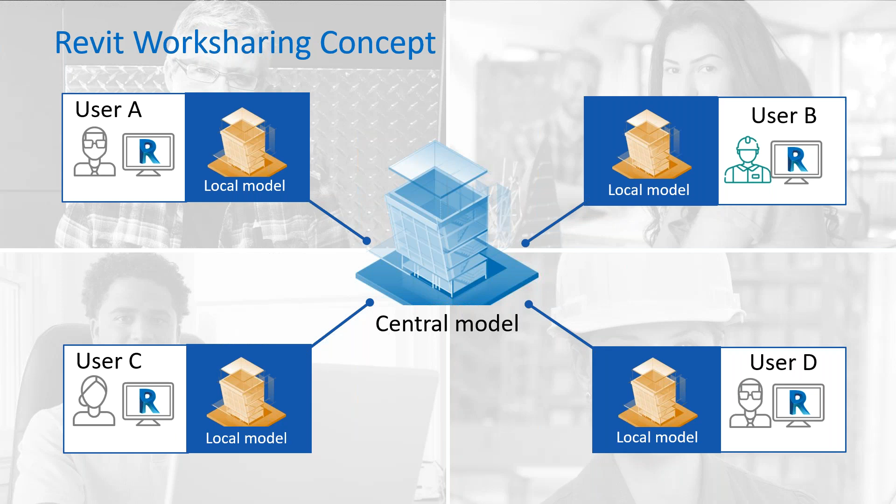The only difference is we're not connecting to a local central model or Revit server, we're connecting to the cloud, which has all kinds of benefits in its own right. We'll talk about that in a second.

We're obviously going to use that work sharing concept, as I mentioned. But what we really wanted to do is take it to the next level—how do we make sure that not only can we connect different users within one company, but how do we set up for success between different design disciplines and different teams? Architectural team and structural team, or architect, structural, and MEP, maybe landscaping and architectural, etc. So it's this question of how do we move this forward—work sharing is one aspect, but how do we connect different teams together? That's really what this session is all about.

For those who aren't familiar with this concept, BIM 360 is our portfolio—and I specify portfolio, it's not just a product. It's a whole portfolio of communication, I would say. BIM 360 is a cloud-based portfolio, what we call connected BIM—BIM with the power of the cloud, as I mentioned before. It means we're going to have a communication process between different users, different disciplines, and different companies through a cloud-based storage platform. That storage platform is called BIM 360 Docs.

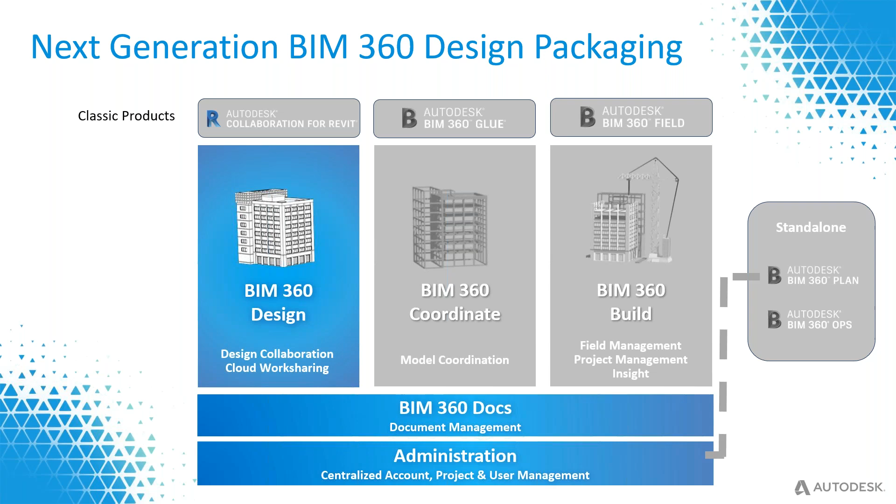Okay, so as I said, we're going to be focusing on BIM 360 Design today. So when we talk about BIM 360 Design, we really have to look into the details. And again, specifically today, we're going to be focusing on the Revit component. So it essentially means that from a Revit BIM 360 Design point of view, we're talking about 3 bits and pieces which make up BIM 360 Design.

One is the interface inside of Revit itself. And that is nothing new, actually. That's been in Revit for, I don't know, 10 years or so. So save to central, reload latest, as I mentioned earlier on. It's actually the same buttons. The only thing we do is we push information from Revit, from the worksets, into a central model, which this time sits in the cloud.

And when I say it sits in the cloud, it essentially means that we're pushing data into that base module, if you will, which is BIM 360 Docs.

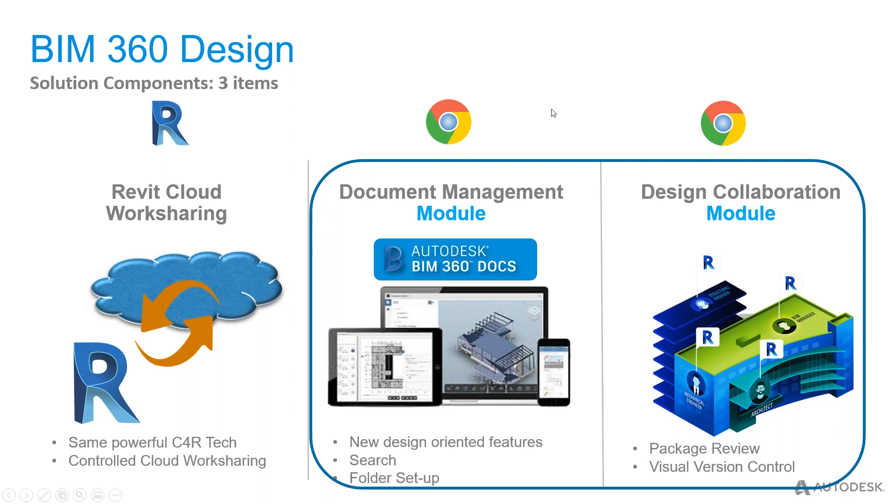But this is really where we want to make sure that we have an official and auditable handover process between different disciplines. Essentially, we want to get rid of those discussions where somebody says, well, I never received your file, or this is the file I was working on, and then it turns out it's not the latest version. So that sort of handover process, we want to have that fully automated, and that's really where this Design Collaboration module comes in.

Okay, so a couple of more concepts, and then we're actually going to dive in. So saving versus publishing. So what you have to understand is that if you look at BIM 360, then there's a couple of aspects here. So as you've seen, there's a couple of modules.

So we do have the users in Revit. There is a central file, but we also have BIM 360 as a location where we have visible files for the wider community. Because one of the things, as I said, it's not doing it justice. It is sort of a Windows Explorer in the cloud.

Well, one of the aspects where it differs from that concept is it has what we call the large model viewer integrated in it, which essentially means that we can view files without having the actual original editing software or authoring tool. So it means that we can view Revit files.

It means that we can view DWG, DXF, but also other file formats such as DGN, IFC, SketchUp files, etc. And the quite critical part here is, as I mentioned, you don't need anything local on your machine. No design review, no DWG TrueView or anything, or even Revit in demo mode or whatever. No, you can just use that viewer and understand those files.

Actually, the next step forward is then to make markups on those files, send them back to the original designer. So again, this is all about communication and optimizing collaboration between different teams.

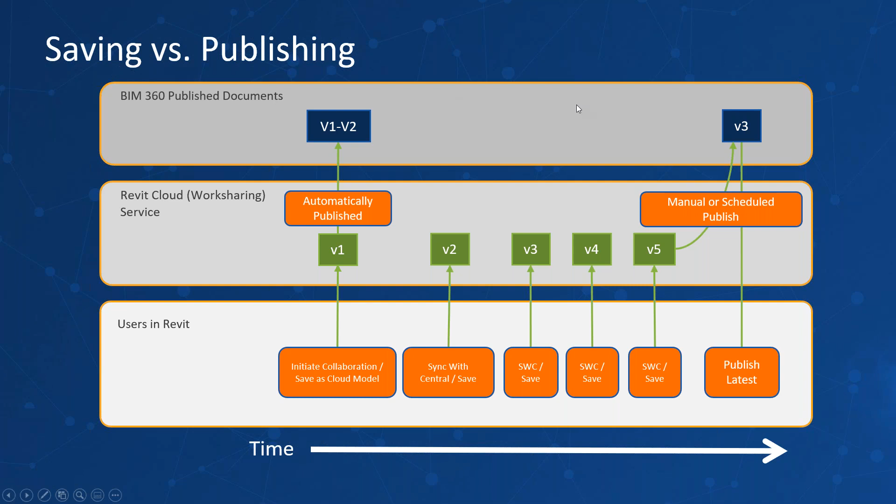Now we're not there yet. So what do we do when we want to communicate between different disciplines? Well, because this is based on BIM 360 Docs, and I'm going to come back to the basics, which is sort of Windows Explorer in the cloud. Well, we can set access rights to BIM 360 Docs.

And so that means that I can actually have an official handover process. And remember, I mentioned this as being part of that BIM 360 design concept, which is the design module in the cloud. So what you'll see is that we're going to have this bubble, which is, for instance, the architectural team doing their iterative design, so save to central, reload latest, etc.

And then we're going to have a BIM coordinator specifically for the architects. He's going to be reviewing that design, and he's going to make sure that he makes something visible for the other parties, for instance, the structural team, to consume, right? We call that a package. So that architectural...

BIM coordinator or project leader or whatever you want to call it, he's going to review the design of his own architects, for instance, could be structural, could be MEP, could be anything really. And he's going to make sure that he's creating something called a package, and you'll see that in action in a minute. And he's going to store this, and this is going to happen actually automatically.

He's going to make sure that that is visible to, for instance, the structural team. Now that structural team also has a BIM coordinator in this concept, or a project lead or whatever. So he's going to review the information he's receiving from the architects. It's not because the architect sends something that everybody has to agree to what they're sending out. So he's going to review this, and he has to accept this or consume this or refuse it. So let's say he's consuming this.

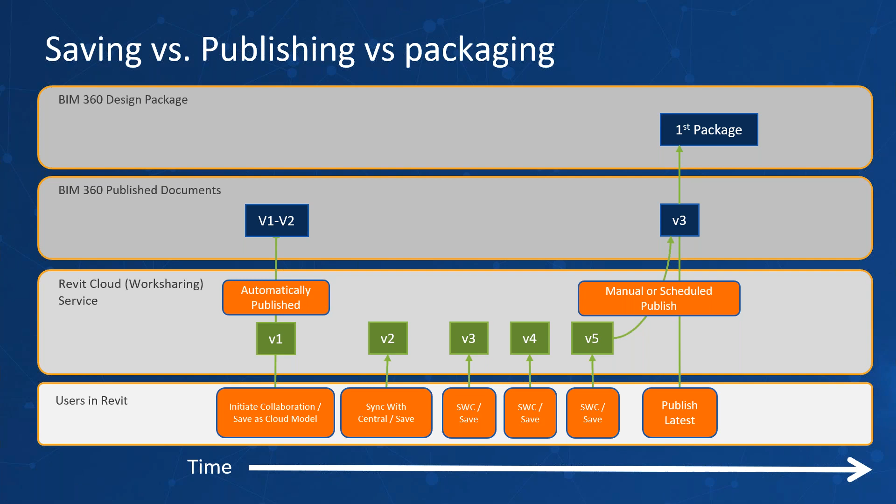Okay, so this is where I want to end right now, and actually let's dive into the product here. So let's go into BIM 360 design.

Okay, so what you'll see here is the design module. Remember, we've got the Revit interface, we've got Docs, and we've got this sort of filter, which is the design collaboration module in the cloud. And what you'll see here immediately is a timeline. So that Save to Central publishing packaging is something that is actually explicitly there in the timeline.

What you'll also notice is that in this case, I'm working with two teams, the architectural team and the structural team. Okay, so you'll also see that there's this square here on this timeline.

And one of the questions I received last time was, well, that's all fine, Revit, but what about IFC? Can we integrate IFC in some form, shape, or other into this workflow? And you can actually. So what you'll see here is that the structural engineer, maybe he's using Tekla and they're exporting to IFC.

Well, what you'll see is that if I go into detail as to what that structural engineer is producing, in this case it's one file - could actually be multiple files. Again, we're not going to go into too much detail here, but they're actually looking at a Struct.ifc file. I'm keeping it very simple here, it isn't really a grand design or anything, but we can have a look at this.

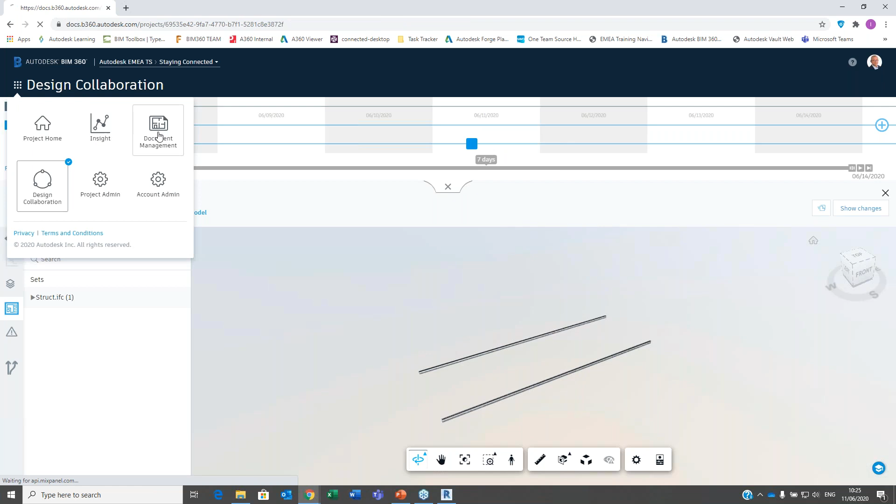So how did I get here? How did I get this structural IFC file to become visible in design collaboration? Let's go back here for a second to BIM 360 Docs, because as I said, it's all integrated, and what you'll see is this sort of Windows Explorer in the cloud, and this is where my file sits.

Struct.ifc version 1, which was created today actually. So how do I get this file into BIM 360 Docs? Well, that's quite simple because we do have a connection even from our local desktop machine - we call it Desktop Connector, and that's what you'll see here.

So there's an interface, which is BIM 360. You'll see that I'm moving on to my, what we call, hub - so this would be your company name, for instance. This is your project, so I've called it Staying Connected, which is today's webinar. Moving into project file structural - so essentially, if I'm using Tekla or anything, I can just export, move into this location and drop my file here. You even get to see the version and everything.

So the second that happens, it's becoming visible here, which essentially means it's visible in my design collaboration module in the structural interface. Okay, so this is just for me to view. Remember that this is a specific folder, and I can put security rights on it. Again, we're not going to go into too much detail here, just for you to understand that, for instance, the structural guys have full access to this, but maybe we've decided to not grant architects access at all to this environment, which would make perfect sense - structural should be in charge of structural design, right?

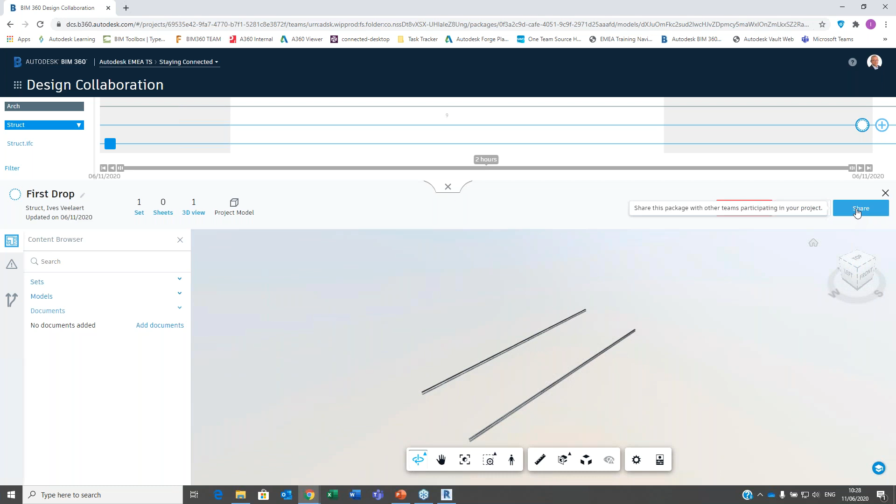Let's do that. And you'll see that now from my point of view as a structural team, this bulb gets colored. Now, the last thing I want to specify here before we take a look at what the architect is going to do is that there is a very specific difference between this first bottom timeline and everything that comes on top of it.

And when I say everything that comes on top of it, in this case it's architectural, but we're not limited to two teams, and you'll see that in a second when I move over to a full-blown project. We can have architectural, structural, MEP, landscaping, even MEP could be split up into piping, plumbing, HVAC, you name it. We can have as many teams here as we want.

So it's quite critical that you understand that this bottom one, which is, by the way, the only one that has the plus sign, which can create packages, this is essentially the company I work for. So me as a person here, I'm working for the structural team, and I'm a BIM coordinator. That's why I have this plus button, and I can create a package.

So what you'll see here on this timeline is that essentially I've used this design, the IFC file, and I've moved this forward as a package. Now, because I'm a manager, a BIM administrator in this whole project, I can actually do something which I wouldn't recommend in a day-to-day business.

I'm actually part of both teams, just for you as an example, so that I can take a look at this from both perspectives. So let's swap over to the architect.

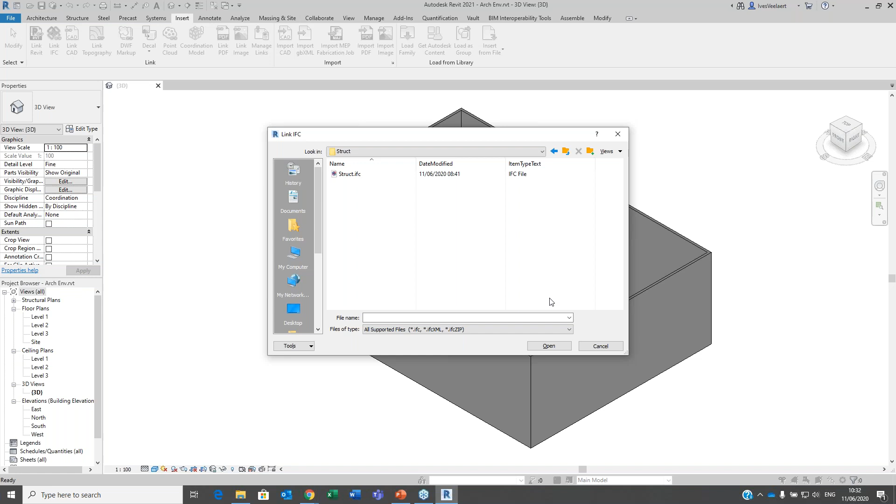So you see there's not that big a difference between a Revit workflow or an IFC workflow, but let's have a look at how I get this file into the cloud.

Okay, so first thing I want to do is obviously create worksets. I really started from scratch here, so I'm not going to specify too many worksets. I'm just going to go with the flow here. This is what we're going to be doing.

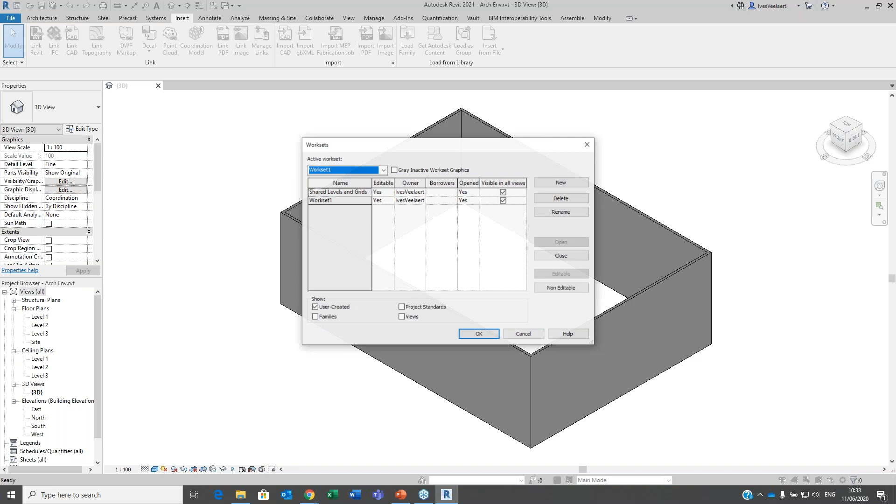And the only thing that I need to do now is say collaborate in the cloud. So collaborate in the cloud, save the model. That's fine because I activated worksets here.

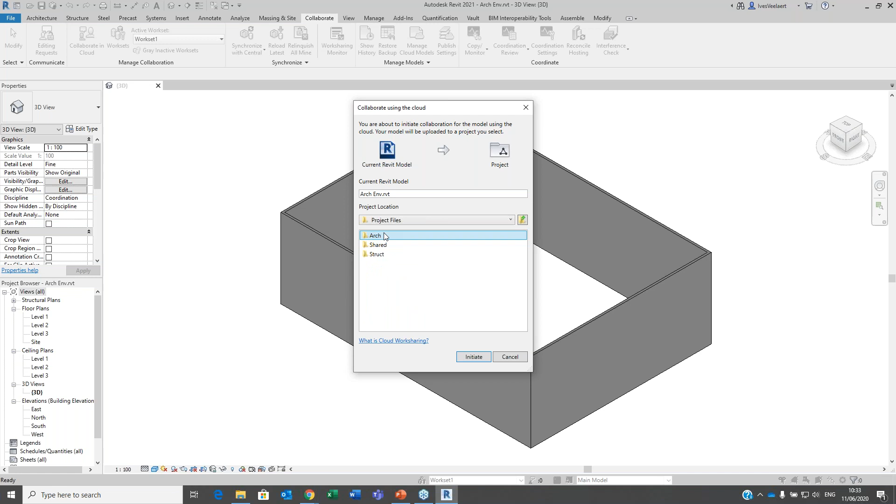And the next question I'm going to get is, well, where do you want to store this? So EMEA technical sales, staying connected, project files. I'm the architect, so I'm going to push this into the architectural folder, initiate.

What you'll notice is we're going to upload this model to the cloud, and that's going to become the central file. Then automatically - and that's different from central files on a shared drive or Revit server, where you still had to create your own local model - this is happening automatically in the background. So saving model to local cache. But apart from that, everything is very much the same.

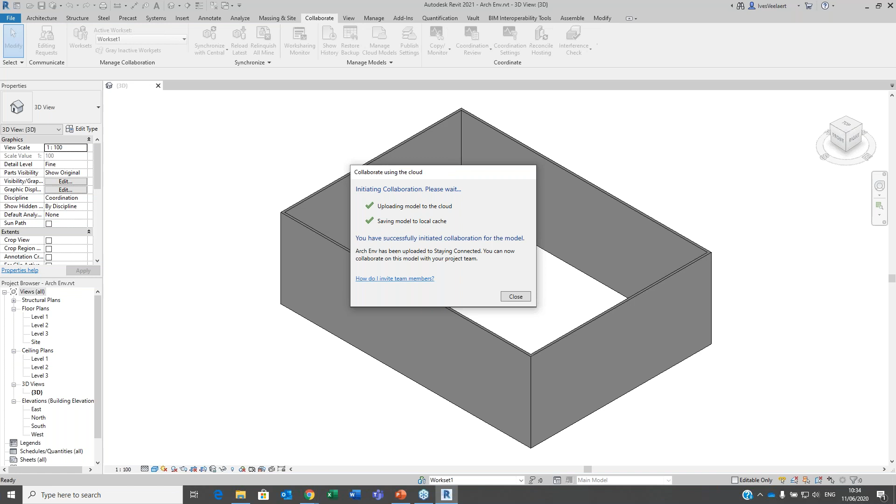The beauty is also that if you already have central files on an M drive or Revit server, you can actually open that Revit central file, detach from central, keep the worksets, and just say okay, save to the cloud. So you can move those files into the cloud, no problem whatsoever.

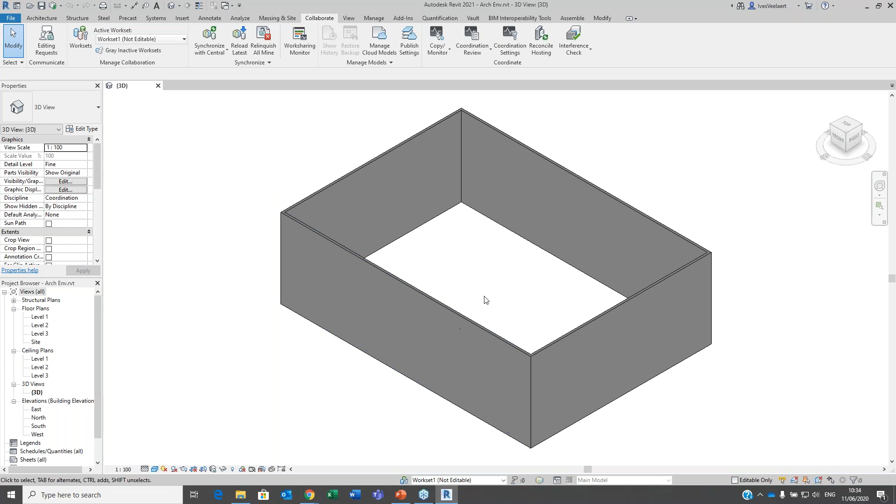So what you'll notice now is that indeed, if I go into collaborate, synchronize with central, it says now BIM 360 staying connected architectural envelope.rvt. If I go into my architectural environment, you'll see that it now says architectural envelope.rvt.

The fact that this is still working is that large model viewer. We're going to get a lightweight representation of this file so that we can use it on just about any device, because we also have mobile apps so you can review this file. Apart from that, this is all the same - I could go into design now, create a package, etc.

So swiftly moving on, because I do want to get into an interview with Thea here. Last thing I'm going to show you is how far we can take this, if you will. So let's go into a full-blown environment here.

And what you'll see is that I now have a different environment. It's called BIM 360 FY21, still on my hub. So this is a different project, and I'm looking at this from the structural point of view - that's the company I work for.

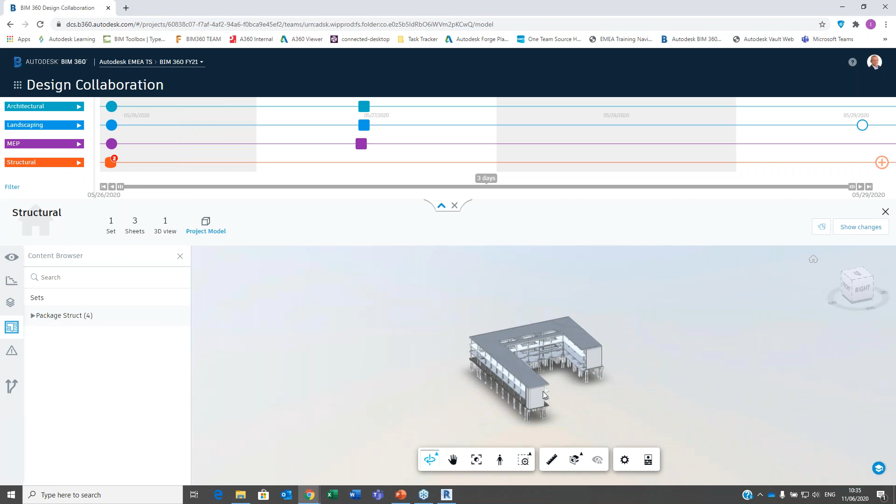So I could actually say, okay, let's have a look at this project model here. And you'll see this is a bit more developed - that's my structural design.

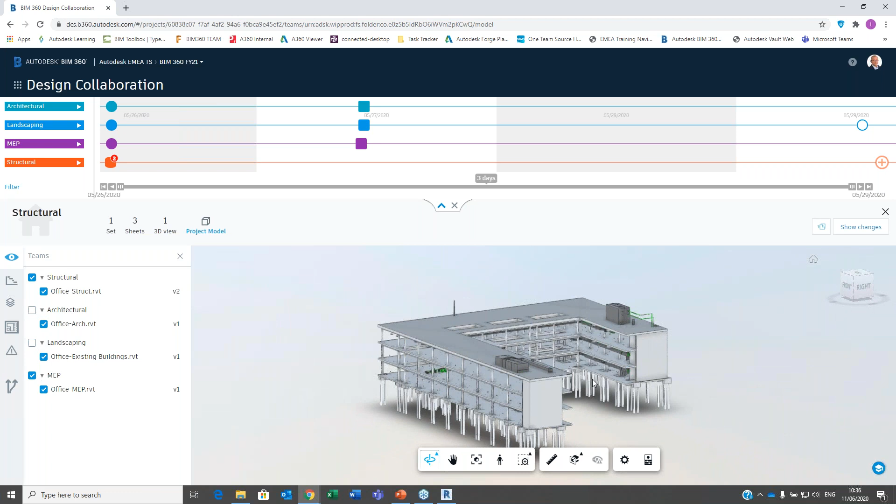Now, the cool thing is that the second you start accepting packages - and you'll see that in one blink of an eye - I actually accepted packages from architectural, landscaping and MEP. So I can actually activate, let's start with MEP, combine those files and look at this, okay?

I can actually put landscaping underneath. And remember, this could be IFC, this could be a Revit file, this could be actually a standalone Revit file - I'm not going to go into too much detail there, but we can save them as cloud models as well. And I can put the architectural envelope around that.

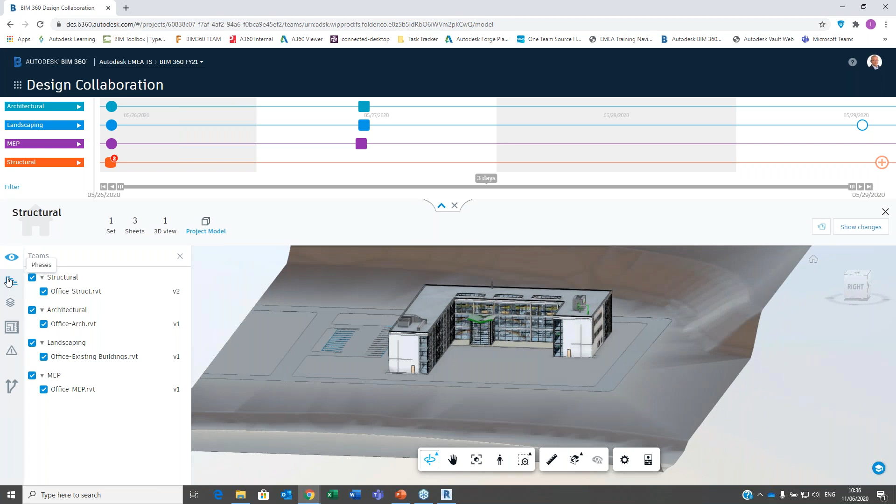Not just that, I could actually go to the second step and say okay, the phasing from Revit - let's have a look at the different phases. I've matched the phases, by the way, by linking those files and making sure that the mapping is correct. So that's what you'll see here.

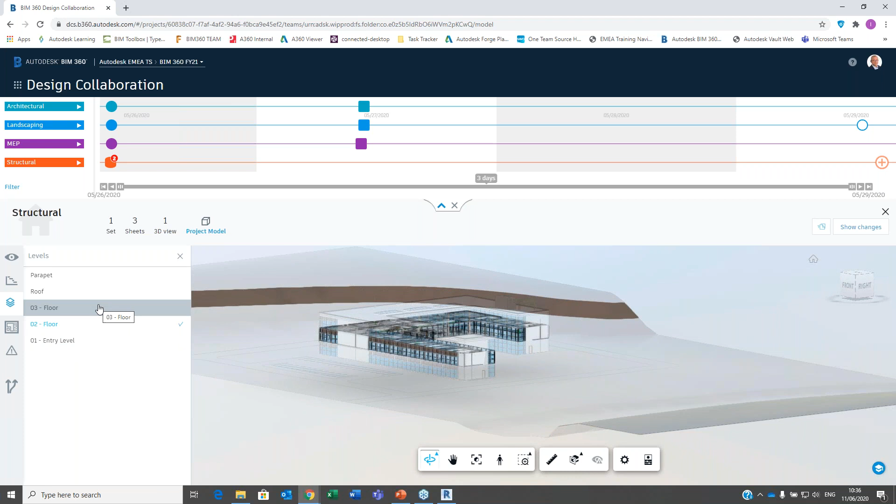But also I can have a look at the different levels, floor 1, floor 2, floor 3, etc. And the last thing here is that I can go and have a look at the content of, in this case, my structural package. And what you'll see is that, as I mentioned earlier on, we can have tech specs and what have you. We can also add sheets and details and what have you to this environment, if you will.

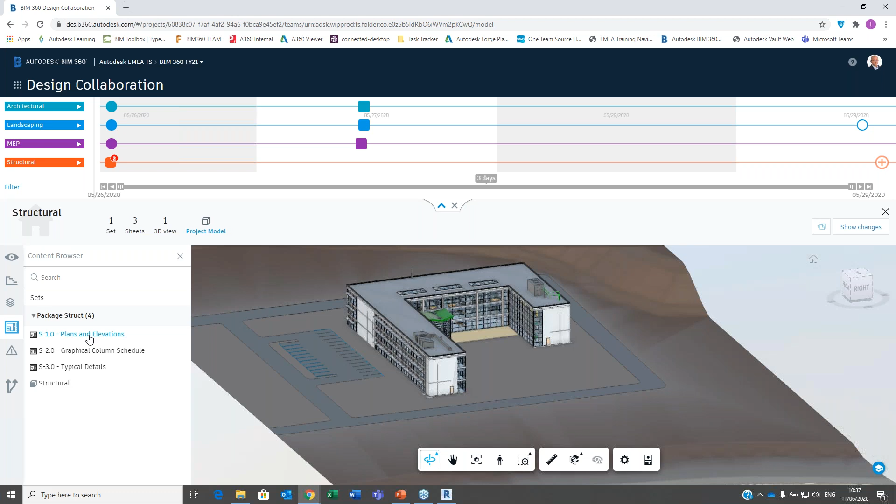So let's have a look at, and let's zoom out a little bit.

Let's have a look at one of those sheets here. I did mention in the overview and short description of the webinar that we were going to talk about something called hypermodeling. Hypermodeling comes in a couple of different shapes and forms. It's a concept of integrating sheets and the 3D model.

One of the first things I'd like to show you is that when you're searching for an address in Google Maps, you can get an idea of what that environment looks like by taking that little guy at the bottom of Google Maps and dragging it in, and then you get Street View. Well, we've got something similar here.

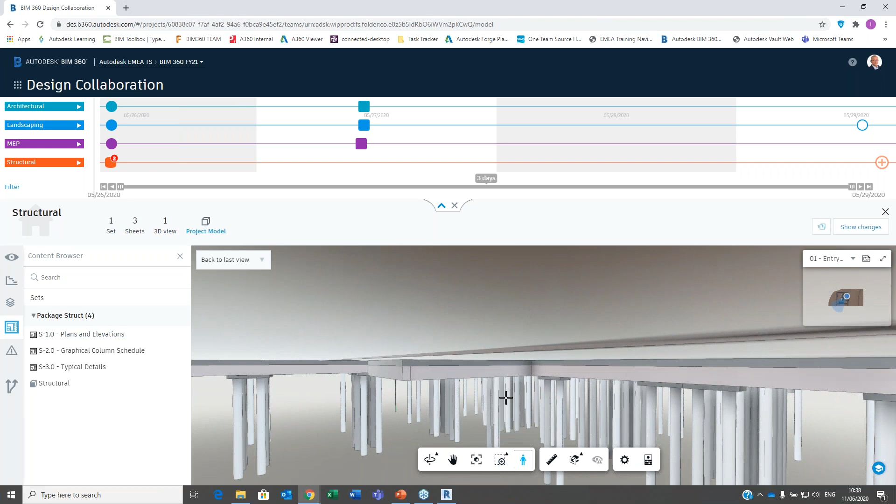So if I hit this button and say, okay, let's have a look at this, it's actually going to show me where I'm at here. I can have a look at my structural design.

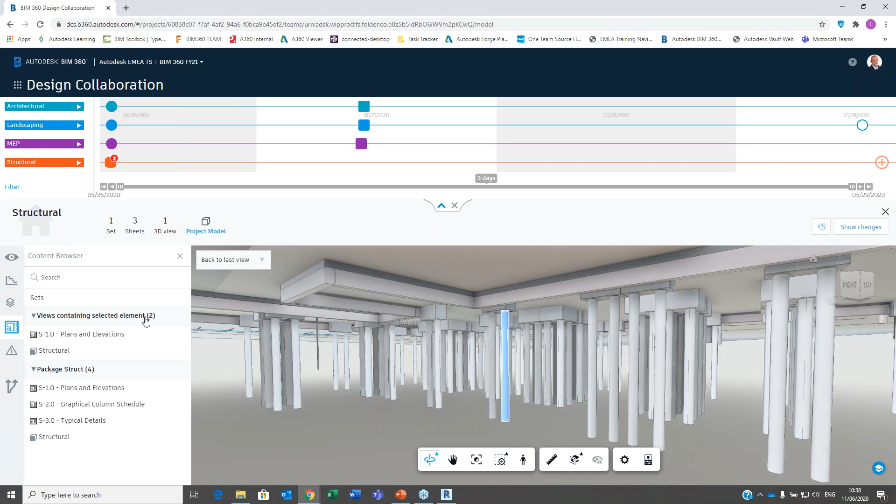Now the beauty is also that everything here is connected. Another aspect of hypermodeling means if I drop out of first person here and select something, you'll notice at the left that something happens the second I select an object. You'll see it says sets package structure. I select this and it tells me views containing the selected element. So I can go back to my plans and this object is still connected. I can zoom in, have an understanding of where this is, look at the properties, etc. So that's really what this is all about.

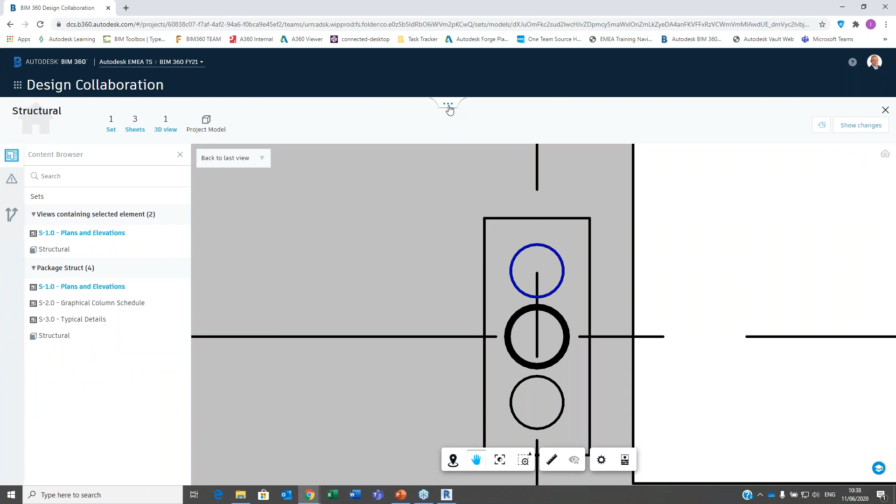All right, let's take a look at the last one, and then we're going to go into the interview. Let's take a look at, for instance, and let's close this for a second, the architectural design here. So just as an overview, I'm looking at this from the architectural point of view. What you'll see is the squares are files.

Actually, the publishing of the Office architectural file, this is a package, right? So what you'll see as the BIM coordinator is that we've published, and let's zoom in here, we've published right after the first, or we created a package right after the first version of the published file. Now, in the meantime, we have two more. If I click on this, we're zooming in, as you can see, 32 minutes. We've got a version here and a version here. So I could actually take a look at that.

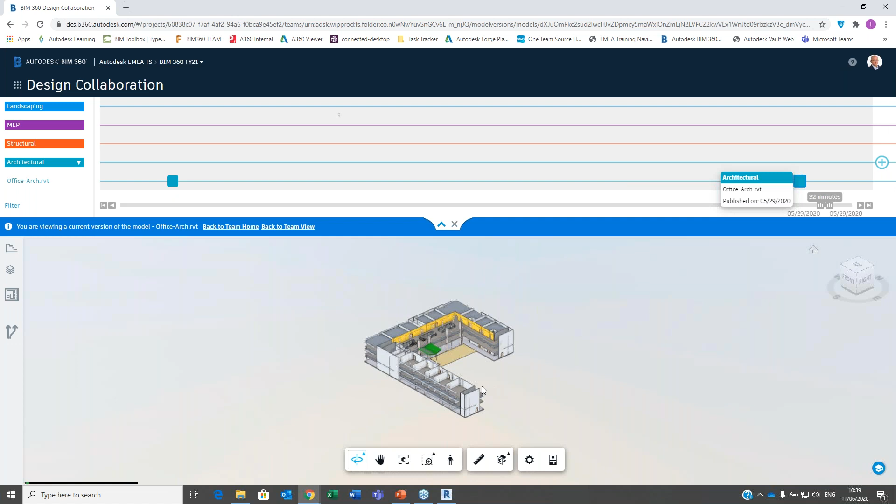Now the question really is, do I need to create another package? What actually has changed here? So the last thing I want to show you is that from a BIM coordinator's point of view, let's go back to document management here. And if I look at the design architectural point of view, we've got version 4 here.

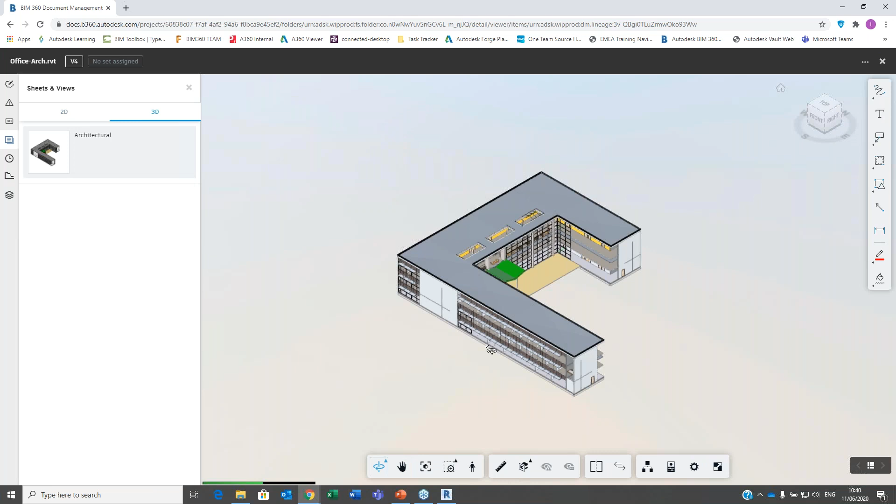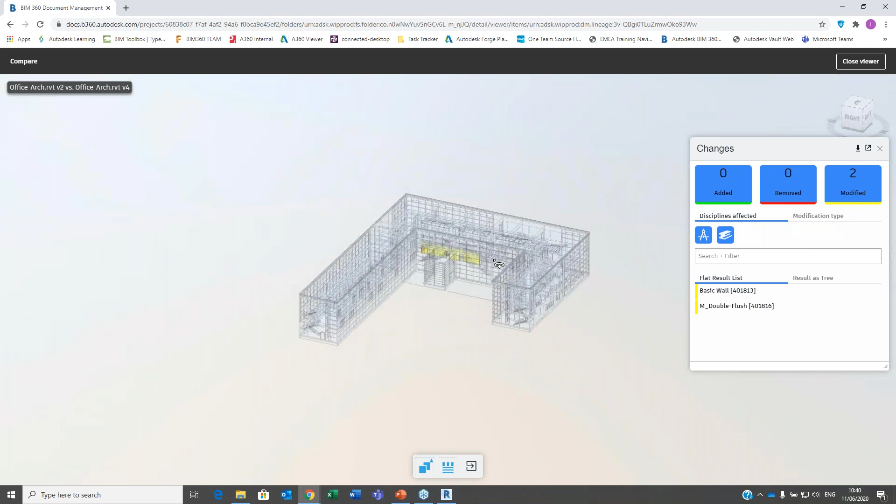That's the latest version, which hasn't turned into a package just yet. So what I want to understand is let's see what happened between that last version, and actually I want to look at the difference with version 2. So let's compare this. This large model viewer is doing a comparison between those different versions. What you'll notice is that it says there's two modifications here: there's a basic wall and a double flush door, which you'll see here. So I can click on that. There we go, okay, so this is version 2. Let's have a look at version 4. So we're actually understanding what has happened between those two versions.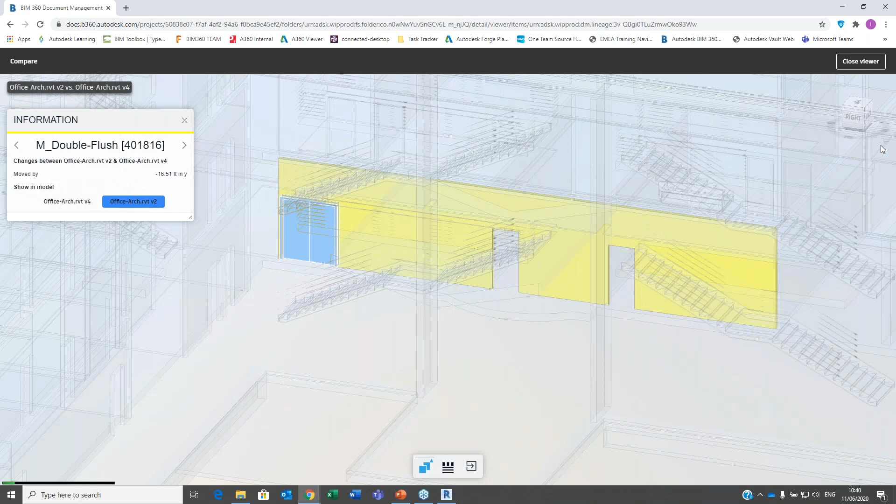I can go on and talk about issues, but we'll keep that to the next session. So what I really want to do now is come back to the PowerPoint here, and let's introduce Raami Architects. You'll hear from Teja in a second. Let's briefly go into who Raami Architects is.

Just a couple of figures here. Their sales in 2019 were 3.18 million euros. The target for 2020 is 3.68 million euros. They have a growth target of 15% every year. And what you'll see in a second is that they mainly focus on healthcare facilities, but also daycare centers and housing BIM developments.

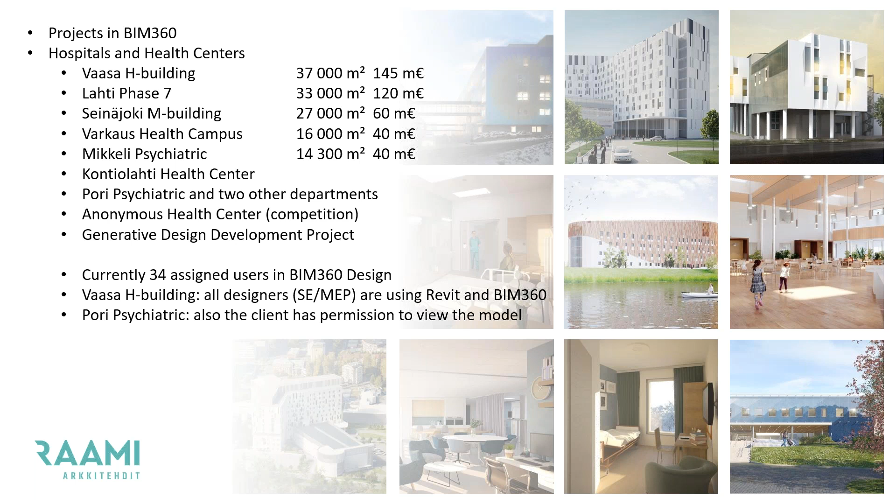So just a very quick view on this first project, the Vaasa H-building. The H letter stands for the letter in the campus, so it's a campus of multiple buildings. This is going to be the new building, built on that old hospital site, but it will be the new main building. Interestingly, they've used the concept of integrated project delivery on this project, so everyone is a stakeholder, down to the building owner.

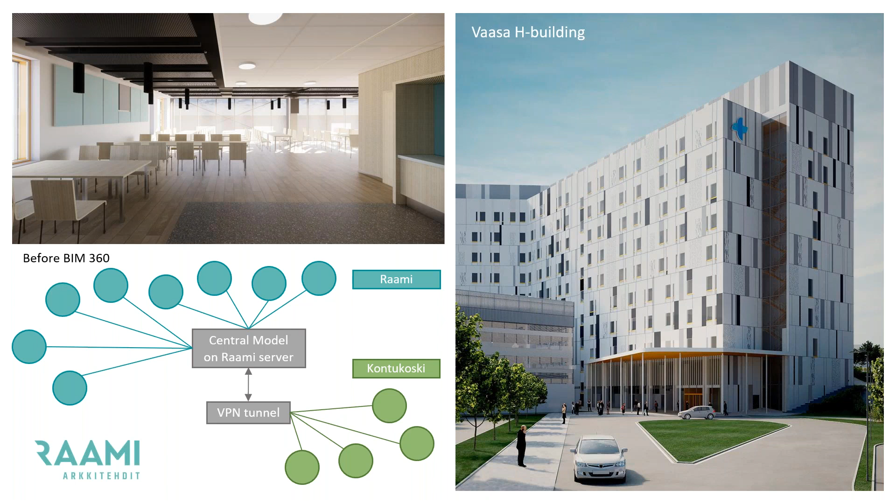So coming back to you guys, when did you start with BIM 360 Design? I think you mentioned there's now over 30 of you working in it. So when did you start this process, if I may ask? We started first with a trial last December, and in January we continued with our own licenses on this first project.

But then in mid-March, when this COVID-19 situation began, all our employees started working from home. At that point, all the projects where we have more than one person modeling were moved to BIM 360. This was a very big change for us, but it was actually done in just 3 days. Wow, and how many projects are we talking about?

Well, the first projects were maybe 5 of them, but during 1 or 2 weeks we got all of them that we have there now. So around 10 different projects.

What I mentioned during the presentation and the demo was that you could move data which already existed. So I'm assuming those 5 projects, especially that Vaasa H-building, were already started before BIM 360 design and then moved on. Yeah, actually all of them were old projects already started. It's quite easy to take that central file, detach it, and push it into the cloud. Everyone gets a local file, and they're good to go.

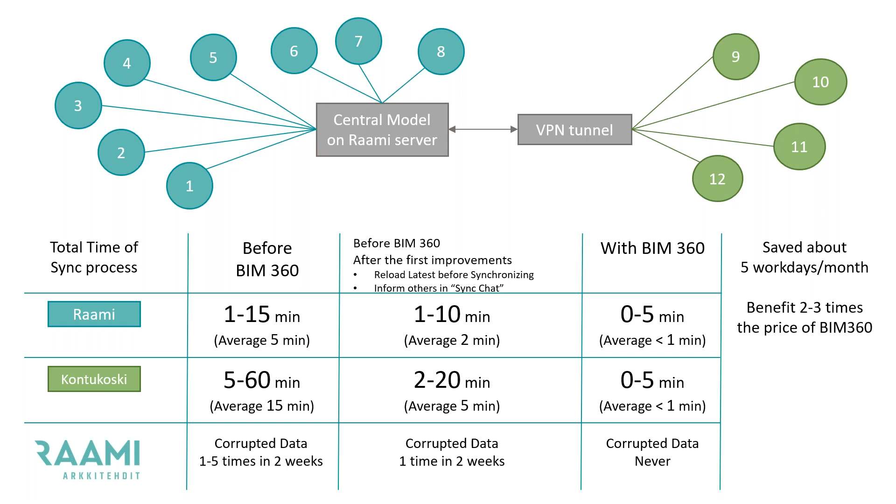I think you also mentioned you did a poll internally and checked what the feedback was from the users - whether they're in general satisfied with BIM 360, and whether they prefer using that or want to go back to traditional central models. And everybody wants to continue with this, with some comments about how it is to use it.